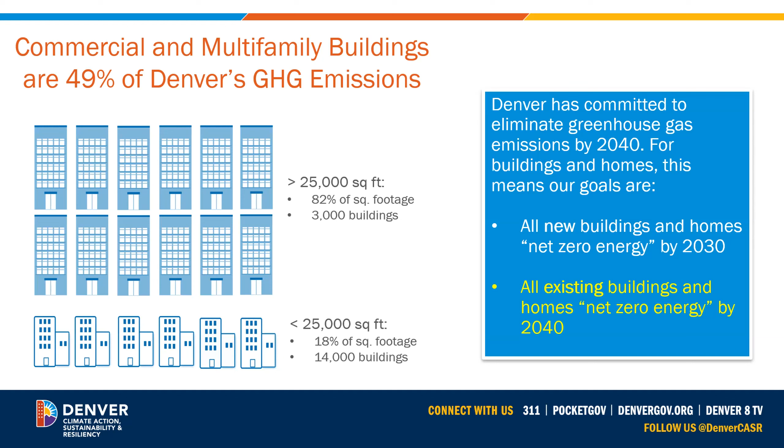As was stated earlier, we're committed to eliminating greenhouse gases by 2040, and we want all new buildings and homes to be net zero energy by 2030. The Energize Denver program has some lofty goals to hit by 2030 that we'll go over in just a second. Also, if you have any questions, please put them in the chat, or if I'm going too fast, tell me to slow down, or if you'd like to stop and revisit a slide, just tell me to go back.

The Energize Denver ordinance covers 3 sections. First is electrification, and that department is helping move the city away from natural gas, with large portions offering education and building incentives and updating building codes. Right now, we're trying to run some pilot programs, and I'll share some links later for multifamily properties or offices in the city looking to potentially electrify before the program really hits the ground running. We also have a benchmarking portion that I hope most people are familiar with.

We're looking at Portfolio Manager, specifically for buildings 25,000 square feet and above, looking at annual energy use and benchmarking. Then the last portion we have is our performance section, for both buildings 25,000 square feet and above, as well as a smaller buildings program that's prescriptive for lighting and solar, covering 5,000 to just under 25,000 square feet.

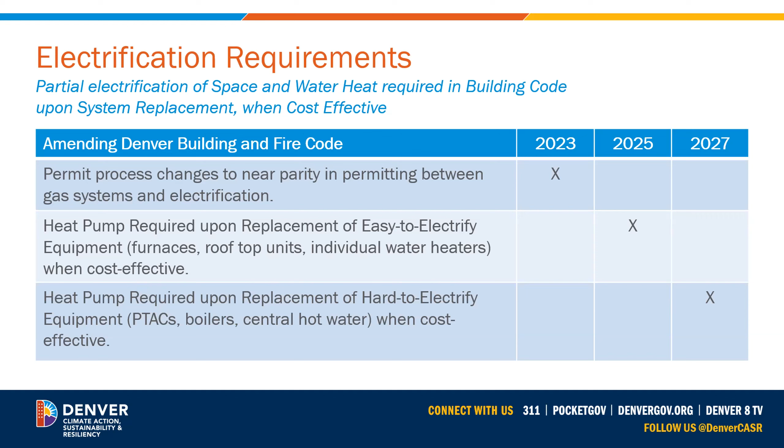The 2022 building energy code - these are for new builds. This one is actually not my specific department, so I don't have as much knowledge on that. But the new building code is trying to go to net zero by 2030 for any new buildings.

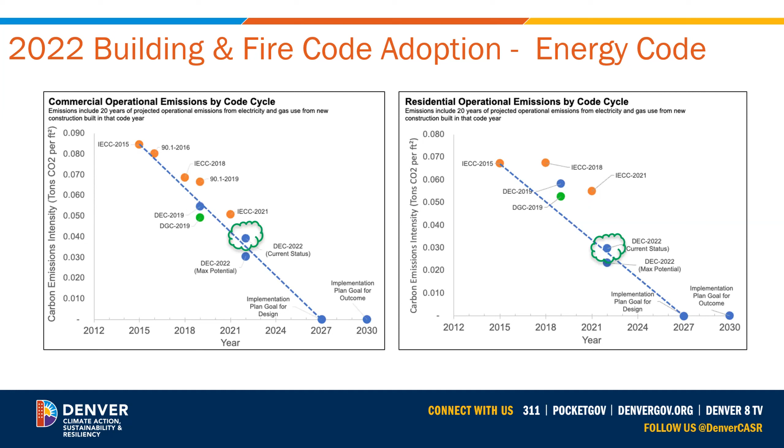We are currently in the process of designing the code, and we should, over the next couple months, have some legislation available.

The code adoption process - the start is where we are right now. So this summer, or last summer, or last 2 years actually, we've taken it from developing the city proposal amendments to now we are currently at city council where there will be a vote, and if approved, over the next couple months we'll have an updated building and fire code, hopefully around 2023, early 2023.

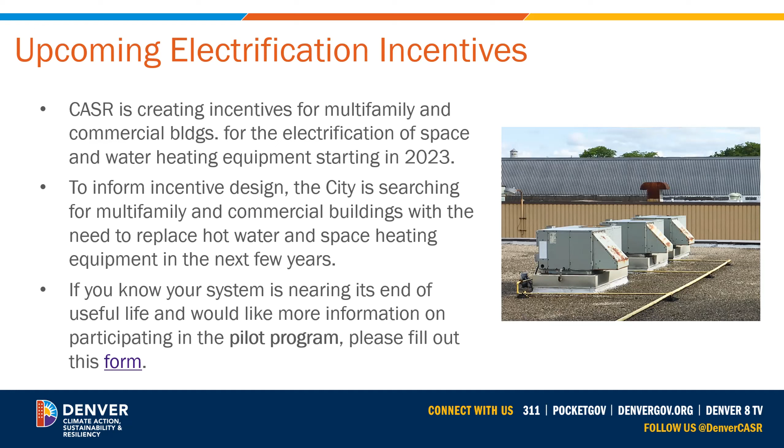Upcoming electrification incentives - we're working on currently creating an incentive program for multifamily and commercial buildings. Right now we have a large focus looking at under-resourced buildings, and we're doing a pilot program that's trying to prioritize that first. So if anybody has any under-resourced buildings that they think might be a good candidate, where they have systems nearing the end of useful life, we're running pilot programs and would love to explore potential electrification upgrades with you. I'll share those links at the end of my presentation.

Benchmarking - as of 2016, we started a requirement to make all buildings over 25,000 square feet benchmark in the city. We actually have an online resource where you can look at those buildings that have been benchmarking and look at their Energy Star scores. Every year, by June 1st, you're supposed to be submitting the benchmarking from the prior year. So for 2024, we are going to require that info to be submitted by June 1st of 2025.

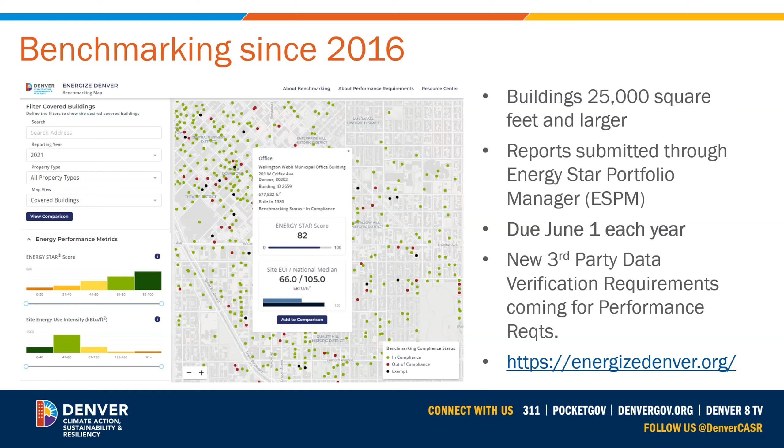One of the new things we're going to do for our target years is have a third-party data verification requirement to ensure that everything being submitted is as accurate as possible. So upcoming requirements, as I touched on, the interim years of 2024, 2027, and the final year of 2030, we're going to have third-party data verification for the benchmarking that's being submitted. We'll have more information on that with our technical guidance being released on November 17th.

And I do see something in the chat. Okay.

And my screen froze. There we go.

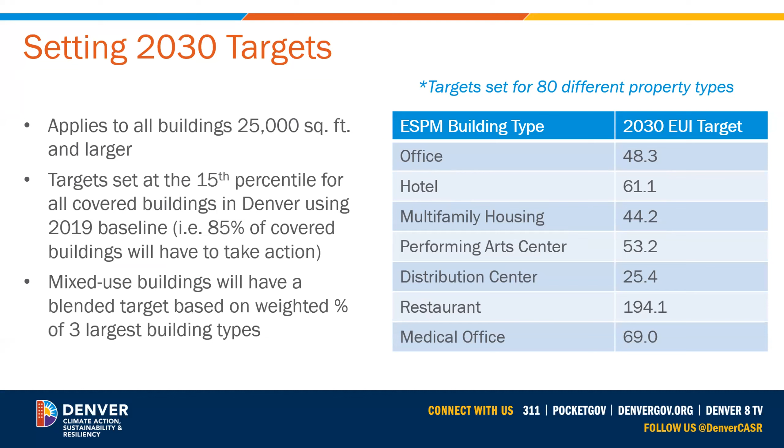Performance requirements - for all buildings 25,000 square feet and above, we're going to explore setting targets, target adjustments, renewables, electrification, and alternate compliance. Right now we have targets set for 80 different property types. Our targets are set to the 15th percentile for all covered buildings in Denver, so 85% of existing buildings will have to take some form of action to improve their efficiencies. Mixed building usage types will have a weighted blended target based on the 3 largest building types.

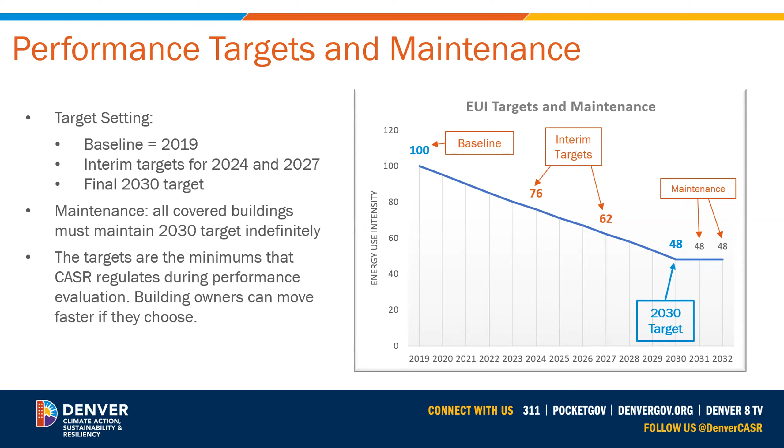As we talked about earlier, we have a progression from your current EUI to your target EUI. So in the interim years of 2024 and 2027, we would want to see some progress towards your final target goal of 2030. These are also minimum requirements - if somebody would like to hit that 2030 target earlier, there's no repercussions for doing that. The sooner you can hit it, the better.

So target adjustments - let's see how I can minimize this thing. One of the things we're looking at, and there will be more information in the technical guidance, is we understand that certain buildings, even though they're the same property type, have certain inherent characteristics that make the building's energy usage tougher to hit the targets that we set.

In that new technical guidance coming out, we're going to have adjustments that look at operating hours for specific building types. We're going to take into consideration indoor and outdoor swimming pools and have adjustments based on that. We'll also look at parking structures and what type of parking structure that is, as well as data centers.

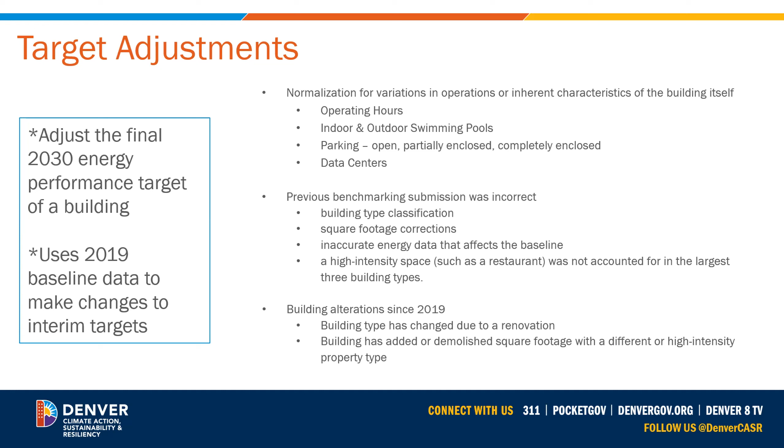We're also going to want to make sure that anything submitted in the past is submitted properly, so we're going to re-examine building classifications and make sure square footage is correct. And if there's any building alterations since 2019, our baseline submission year, or any major renovations, we'll re-explore to make sure it's properly submitted under the right property type. Obviously, if your building is getting demolished, we're going to need proper paperwork to show that the building is planning on being demolished, and we can get you exempt from the program.

Electrification credit. This is going along a potential target adjustment. When you submit your information, we're going to look at the amount of electric usage on the building. And if a building's usage is 80% electric, we're going to offer a 10% increase in your 2030 EUI target.

This is a retroactive target adjustment that we're offering. Part of the city's goal is for the city to electrify as much as possible and reduce the usage of natural gas. So if your existing property is 80% electrified, we retroactively give a 10% EUI credit.

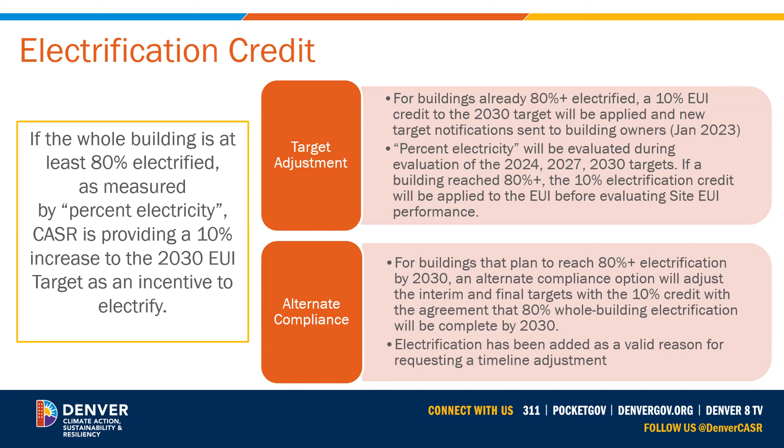That will go to your 2030 target and also affect your interim targets, increasing them as well. If your building isn't currently 80% electrified, but you're planning on hitting 80% electrification by 2030, we'll have an online application where, if that's your goal, we will allow that 10% credit for your interim targets as well as the 2030 target. But we'll have a higher fine structure if you do not hit the 80% you're hoping to hit by 2030.

Renewable credits. We are taking into consideration solar or wind, both on-site and off-site. It will be credited to the building's total energy use before performance targets are evaluated, regardless of your REC retainage. The way this is going to work is we'll look at your 12 months of renewables and subtract your renewable usage from your total annual usage to give you an EUI adjustment.

Ideally, we're trying to incentivize people to do long-term contracts, 5 years plus, for any type of contract. If you're doing a short-term subscription, month to month, that subscription will only be applicable to a certain percentage of usage for your interim targets of 2024 and 2027. They won't be able to be applied to your 2030 targets.

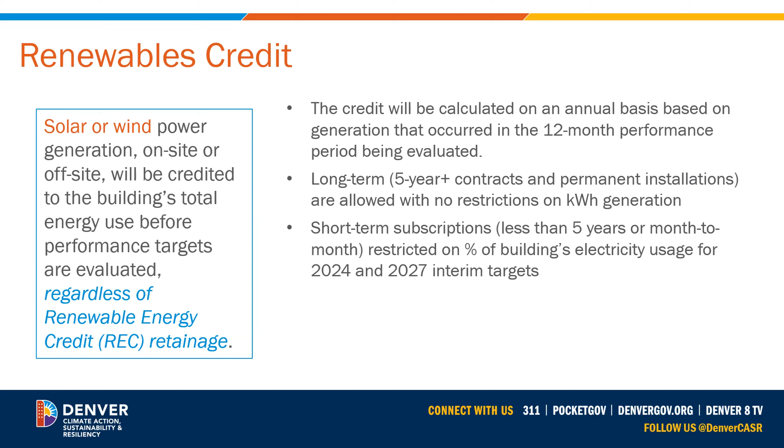There's a quick table of samples of renewable usage. On-site solar and wind, we consider that a long-term contract. For documentation, we're going to look at the total kWh generation and proof of ownership. For any type of renewable contract you have, we'll want proof of subscription or proof of ownership, as well as your total kWh generation.

I can come back to this slide if people want to look it over a little bit more, but I don't know if we have to read through every different subscription option. This will also be released in November when the full guidance is out.

Question: if you do have questions, I want to make sure I get to them. Do offsite renewables need to be on the same grid as the building in question? No, they do not. As long as we can associate them with the property of the building owner, you should be able to attribute it to the property.

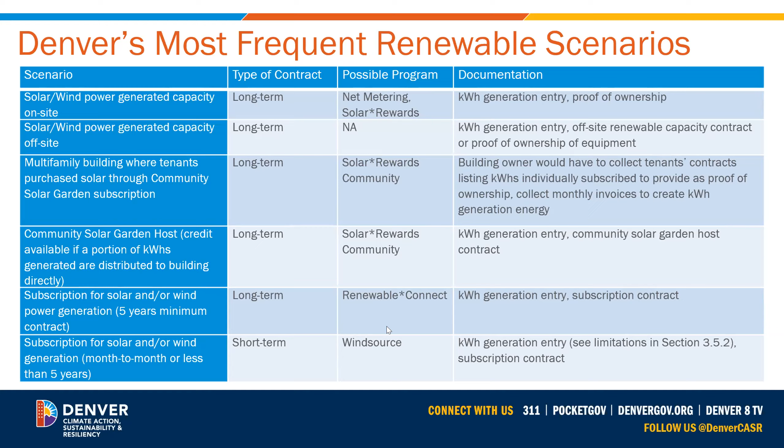Alternate compliance: timeline adjustments. We are offering timeline adjustments so you can extend past the 2030 target under certain situations, such as end of system life, major renovations, historical landmark status, financial distress, or if you're looking to electrify.

Steam loop is also a big one. We understand it's very hard to get off the steam loop, so we're starting to build a focus group specifically for steam loop. If anyone has properties they know are within that, we'd love to help get them included in this group so we can talk in more depth and help adjust targets if necessary to ensure they get into compliance.

Do I know if Renewable Connect will have more space in the future? Xcel is working on a program right now where they're trying to extend and open up more opportunities. I can send a link after this if you're interested. I don't know the full extent of what Xcel is working on, but they've told us they're trying to grow and expand it in order to hit the capacity they need.

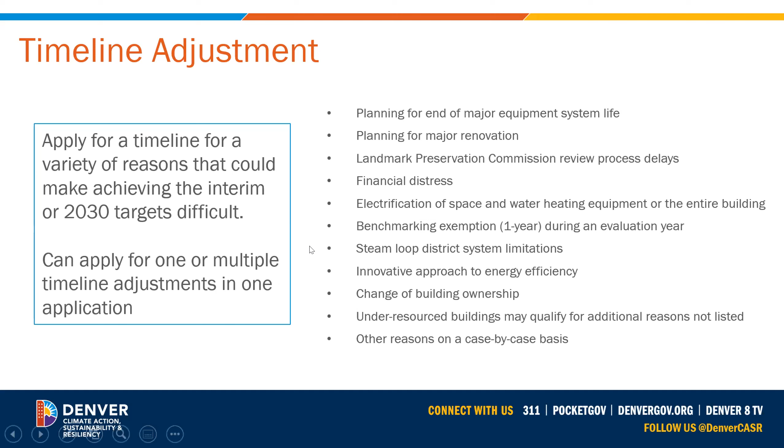Timeline adjustment application. In order to receive a timeline adjustment, we're going to require submission of a couple items. The goal of this is to build a plan to show that there's a plan built out for specific upgrades in order to get the building into compliance.

What we're going to require is an ASHRAE level 2 energy audit, as well as a retrofit plan, electrification feasibility report, operations and maintenance program documentation, and any supporting documentation that will tell the story of what needs to get done in order for the building to reach compliance.

One of the things we'll be considering with certain equipment is the useful life of each piece of equipment. Ideally, people are planning for when a piece of equipment is getting towards the end of its useful life, what they're going to upgrade it with, and understand the efficiencies that will come with that.

Once they submit that plan, we'll review it with the building owner, and we'll come to an agreed upon timeline, and penalties will be assessed if the plan is not completed as agreed upon.

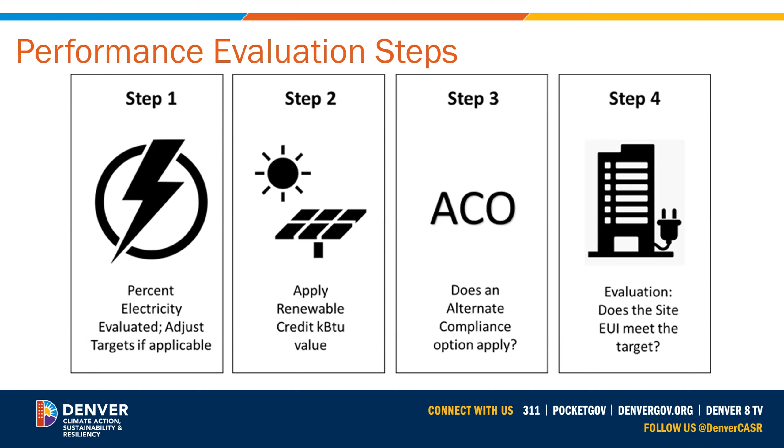Penalties: our goal as CASR is for everybody to reach their targets by 2030. We're committed to do everything we can between alternate compliance options and flexibility for all these buildings to get into compliance. But penalties will be assessed by examining a 12-month performance period for the target year after benchmarking is received.

That's by June 1st of the following year. The way the penalties will work is it's actual KBTU used versus target KBTU, which is the equivalent of KBTU not achieved. We multiply that by our penalty cost to get the final penalty amount.

Is there a bond or other stake dangling over projects prior to a non-compliance penalty? When there's an agreed upon timeline...

When you say bond, can you elaborate a little bit more on that, Andy? Yeah, I was specifically asking because Seattle has something kind of similar, where if they're doing a development incentive where a project has an agreed upon EUI target with a 12-month post-occupancy period, they require the building owner to sign essentially a statement of financial responsibility, or have some other kind of paperwork in place so that it's not just issuing a penalty without any recourse. And it's caused some challenges, obviously, that's a bit of a challenge for a lot of owners and they don't like it.

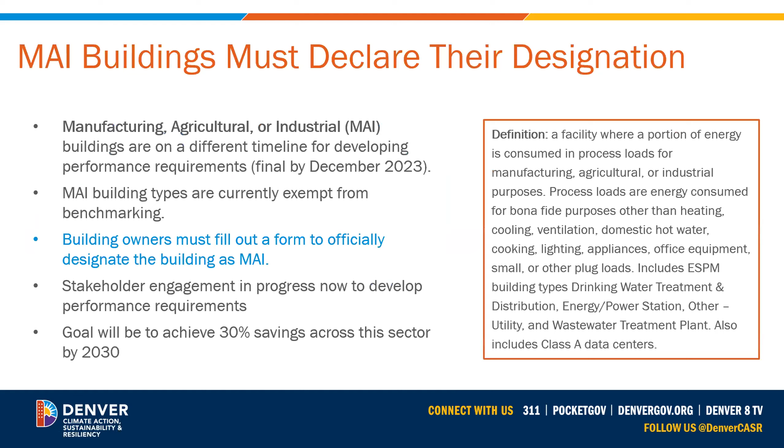Last, and then I'll go back to the chat and answer any questions. A little timeline for us.

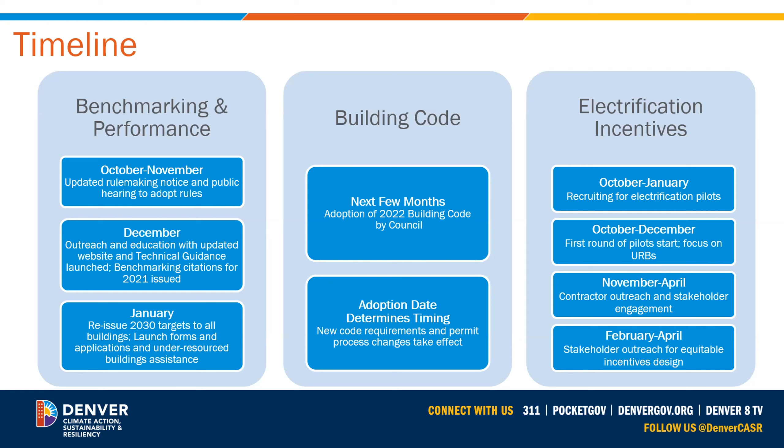So the big thing right now is we're trying to recruit some electrification pilots again. So if you're interested and you think you have a good property that might qualify for the program, I will add the pilot submission form into the chat after the meeting.

Questions? I think I have one more question in the chat. What would determine if the penalty is at the maximum or minimum level?

So the maximum level is if a building's not benchmarking and they more or less are lying, or we catch them making up information about their building, that's when we would have the highest penalty level. Other than that, we're going to be looking at 30 cents per kBTU out of compliance for virtually everything besides that situation. There is a 50 cents, and I'll go back to that.

So we do have a 50 cents per kBTU penalty for being out of compliance with the timeline adjustment. That means if you don't hit the targets agreed upon with us, then the penalty structure will be higher than the original just being out of compliance.

Why is parking included in the drafts issued in August and September? What is the intent there and how does that work with Energy Star Portfolio Manager definitions? So I don't know if this is going to exactly answer your question, but the purpose of including parking is we're going to give a target adjustment that looks at square footage and the Energy Star EPA guidelines on additional usage per square foot of specific parking types. We're going to offer a target adjustment based on the size and type of parking garage that exists. Hope that answers that question.

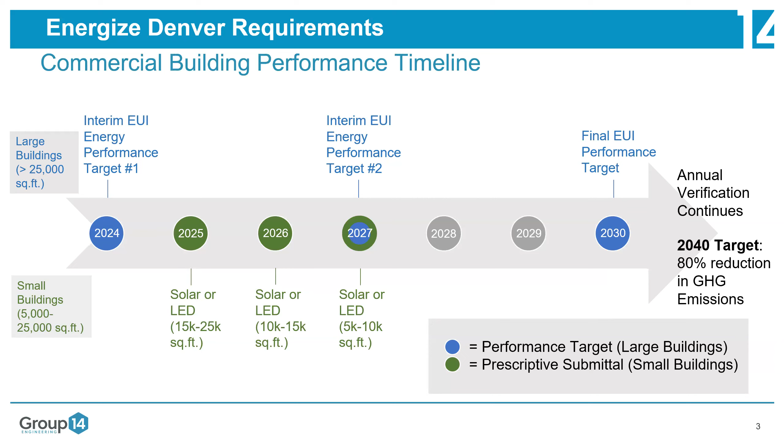All right, so we'll get rolling here with some additional details. I'm going to try not to repeat too much information, but I am going to add a little bit more context I think will be relevant to some of the energy providers and energy modelers on the call today. So we've already heard the overall timeline and the various elements, the interim targets in 2024, 2027, and 2030. I wanted to hone in a little bit on some of the rules and regulations details and changes that have occurred in the most recent rounds.

The last of which, Denver indicated that they did not receive as many comments, so it was pretty close to final in the last version that they submitted. So a couple of these were mentioned, but I wanted to give a little bit more information on the data verification. This is now going to be required for each period, so 2024, 27, and 30. I put on here the credentials that the rules and regulations allow for people to perform this assessment or verification, and what the requirement is to complete the Energy Star data verification checklist. The main things that we're checking are the factors that go into EUI.

So the main being the area, and then the other being the energy use. I know we've been starting to check this for a lot of buildings, and a pretty high number of them have something wrong with either of those two numbers. Either it was an area that was maybe taken off of a lease agreement that is not the actual gross area of the building, or a tenant meter that was missed and just wasn't included in Energy Star.

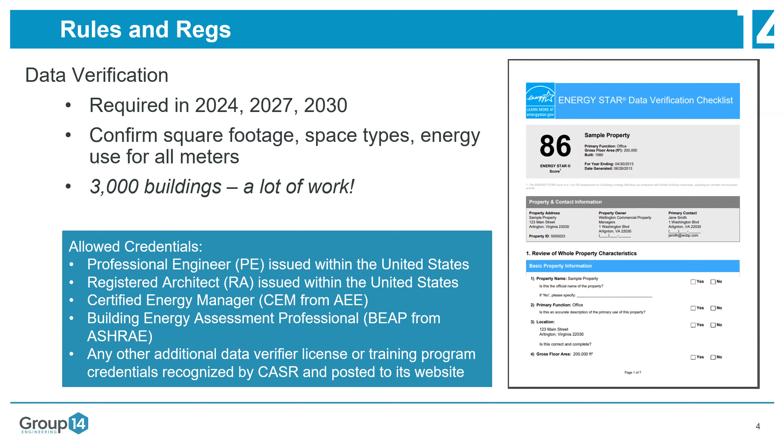So it will be important. I don't think it'll go straight to the maximum fine if you accidentally have wrong data, but it will need that verification at that time. And it's a lot of buildings, so it's maybe not the most fun work, but a lot of people are going to be needed to do these verifications.

I just wanted to clarify on the target adjustments. I know there was a lot of questions and discussions about this early on. The target adjustments used to be an alternate compliance pathway, and there was talk of potentially doing energy models or energy audits to say what a building could do. At this time, Denver has decided not to go down that route of submitting what the building's maximum savings potential is. It's too difficult to be consistent, unless the city's doing the analysis themselves, expecting every energy consultant to do the same energy audit or the same energy modeling to say what is really possible was just determined not to be feasible or fair.

So really, it's just sticking to the adjustments that are noted by Energy Star that have very clear impacts to EUI. So if you have a swimming pool, Energy Star says how much extra energy that would use. So these adjustments would be kind of tacked on to your target to allow this additional amount of energy.

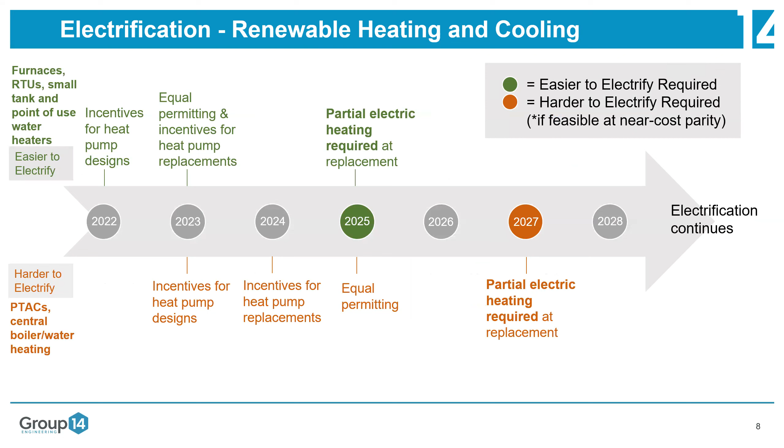These are the two buckets of incentives right now. One is the steam to electric conversion program—any building on the steam system can apply if they want to switch to electric systems. There's also the pilot application, which Derek mentioned, for incentives to switch to electric. Right now this program only focuses on the first round, which is our easier to electrify equipment. So if you have a boiler that's natural gas, not steam, and not part of this first round, it would not be eligible for incentives in this electrification pilot at this time.

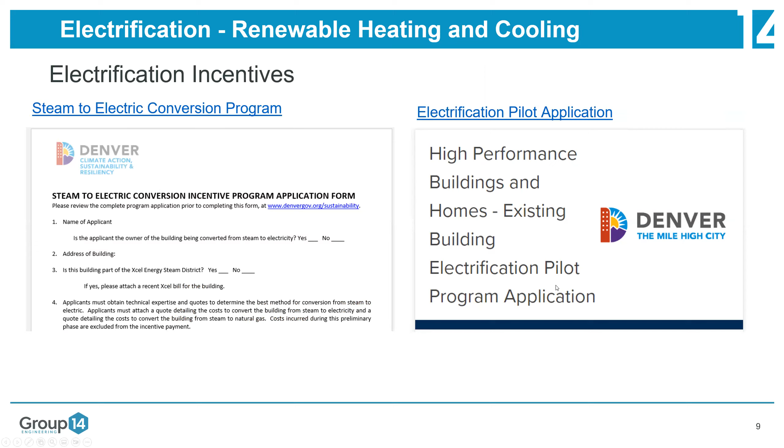Wanted to pull this together with the Colorado performance timeline. We're working with the state on some analysis for that task force, which is coming up with recommendations. Right now it looks like it will be a similar program with EUI targets, and with their carbon reduction goals, the percentage reduction is similar, so the 2030 targets will likely be similar. It will be a little tricky because they have a different interim for whatever reason.

It got put into the Colorado state bill: 2026 as a 7% reduction, then 2030 as 20%. So it's not a straight line from now to 2030, whereas Denver is a straight line—you just pick the interims along your line. This one has a different reduction needed to hit that emissions path. We're not sure yet whether they'll actually keep that non-straight line or adjust it, but that's a difference there.

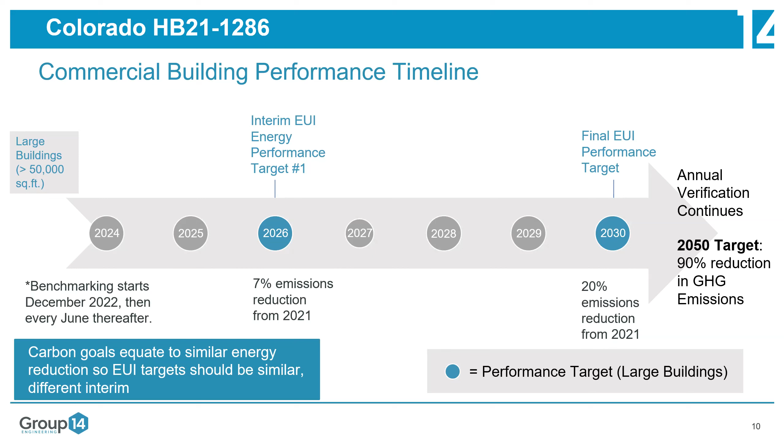They also have a difference on the renewable energy side, which I'll mention a bit. I wanted to give an example—we're starting to do these studies for building owners and portfolios of buildings. Some just have the goal to decarbonize, and some are just trying to meet the program. Both have the same kind of end goal, but might have different objectives from what the owner is trying to achieve. I wanted to give an example of how we're looking at these projects.

First, doing that inventory, looking at where the building's at, and a big part of that is verifying their data—is the baseline really the baseline? Do they have the right areas in the system? What is their actual energy use? Then setting the goals for that reduction. For some building owners, it's just meeting what the city requires. Others have more aggressive goals, like wanting to meet net zero or zero carbon by a certain date.

From there we're really looking at three different prongs to the study: energy efficiency, electrification, and renewables. Energy efficiency—trying to reduce as much as we can to start. Electrification—having a plan for replacement. And then renewables, which I have shown at the end, but adding renewables can happen anywhere throughout the process, especially if you're going to have a hard time meeting your interims. You might have to stack on renewables, on-site or off-site, to hit your goal or EUI target and avoid penalties.

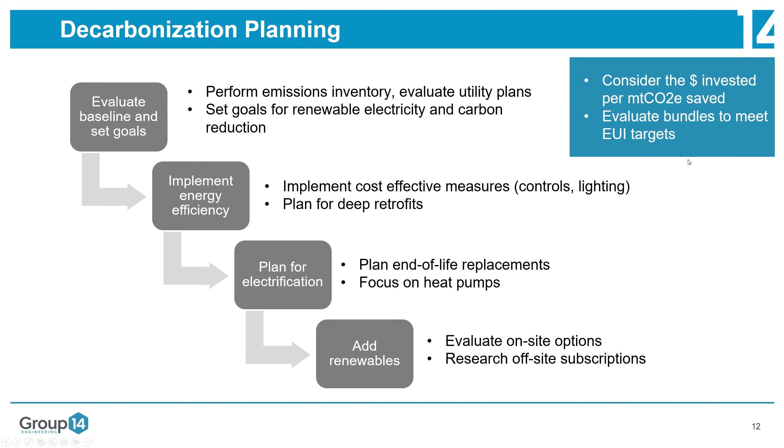And this is just an example of how these things don't always align. This is a study that we did for Denver Public Schools.

If you look at energy use intensity, natural gas, this is across their entire portfolio, so over 170 buildings. Natural gas is by far the biggest culprit in their energy use per square foot, their EUI. So if you want to reduce EUI, you focus on natural gas, but the energy costs, electricity is the biggest culprit. Natural gas is still very cheap. So it kind of flips the picture there. If you want to save costs, you're looking at electricity.

And on the emission side, the emissions look closer to the cost right now than they do the EUI, but as we go over time and the grid cleans, it really becomes a much smaller piece of the pie. So looking at electrification from the emission standpoint, kind of setting those goals of where are you at now, what are your objectives, and what is the best package to get there.

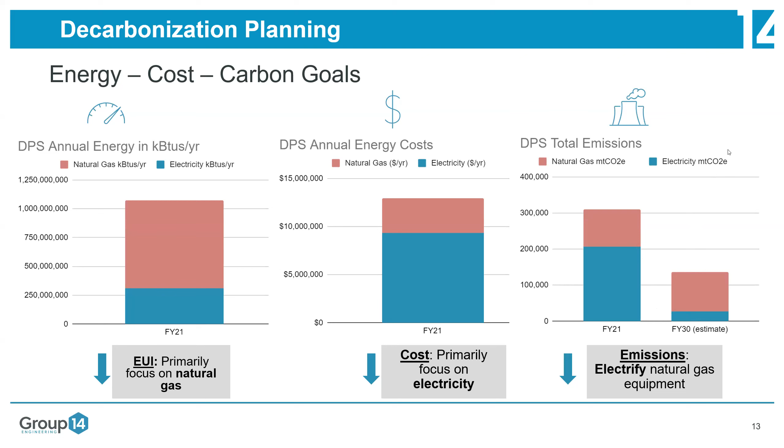This is also from that same study where we mapped all of the EUIs of the schools, looked at CBECS, so the Commercial Building Energy Consumption Survey, sort of this national average number which is more like 70, and also the EUI for the city of Denver for schools, which is 48. Denver Public Schools does not have to actually meet the 48 for the city, since they're not bound by the city rules, but still wanted to evaluate following those recommendations.

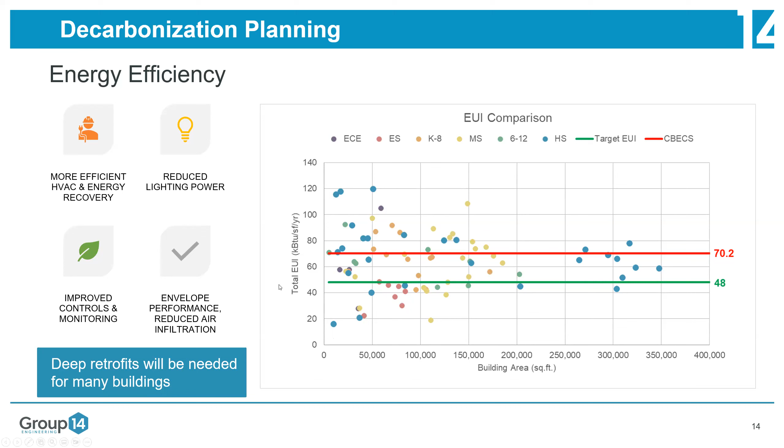And as you can see, for this group of buildings, it's kind of all over the board. A very few number are under 48. It was a very similar spread to what the entire city looked like, so less than 20% have already met the goal. Point being, there are a lot of buildings that are going to need deep retrofits if you're really just going to try to meet the EUI with improvements. You can always add on solar, or offsite solar, but just getting the EUI down alone is a pretty big undertaking. Some of these have 50, 60% reductions, which is a pretty challenging modification.

Electrification, just wanted to note here that Denver kind of has it as like easy and then everything else, or they specifically reference boilers and PTACs. There is a lot of other equipment that does have viable heat pump technology today. So as we do these studies, we're looking at where we can incorporate that. Specifically for Denver Public Schools, there are unit ventilators that can be electrified now, used in a heat pump technology. So there are heat pumps now that can be in this distributed configuration. You still have to keep your boiler for backup. So there are different nuances there, but there is kind of technology today.

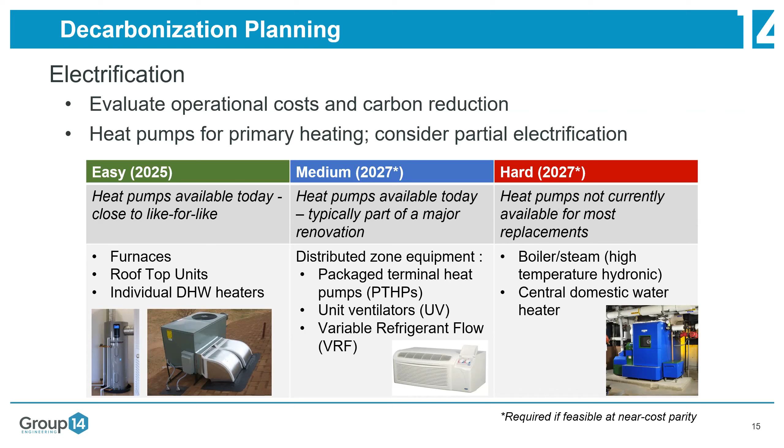When we get into the boilers, that is still hard to electrify, mainly because there is not heat pump technology available for that high temperature heat. In a lot of these, we are recommending partial electrification, where you keep your natural gas for backup. It could be a natural gas boiler, it could be a natural gas section in your rooftop unit, and that really helps reduce the electrical first cost and operating cost.

And then renewable energy, kind of that third prong to this, is determining goals in future electricity use. This one gets pretty tricky in the terminology around renewable energy credits. Right now, Denver is saying that it doesn't matter if you sell the RECs or not, you can count any solar that you're subscribing to or is on your buildings. The Colorado program is not allowing new RECs. They said they would grandfather in existing solar, but once it's passed, you can't add new solar and sell your RECs and count it toward your EUI commitment.

So this could, in the rules and regs language for Denver, it says that any RECs or any version of RECs are allowed, but this could change and may align with the state. But if it does change, they will continue to grandfather in the solar that did have RECs. So you just have to keep an eye on if they do change that language and consider whether or not you're trying to meet both programs.

There's also some nuances in what you can say. If you've sold the RECs, Xcel Energy has a whole thing on their site about what you can and cannot say, and you're really not supposed to say that it's your renewable energy anymore. So if you want to say we're 100% renewable energy, if you've sold those RECs, technically that's not true. So there's that, it really needs to keep the RECs.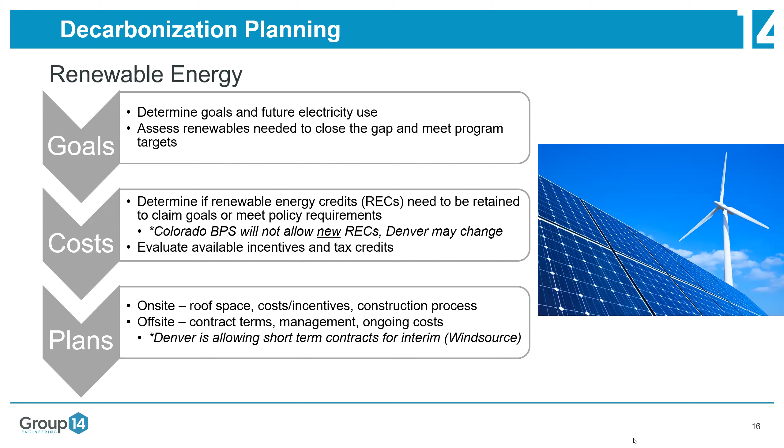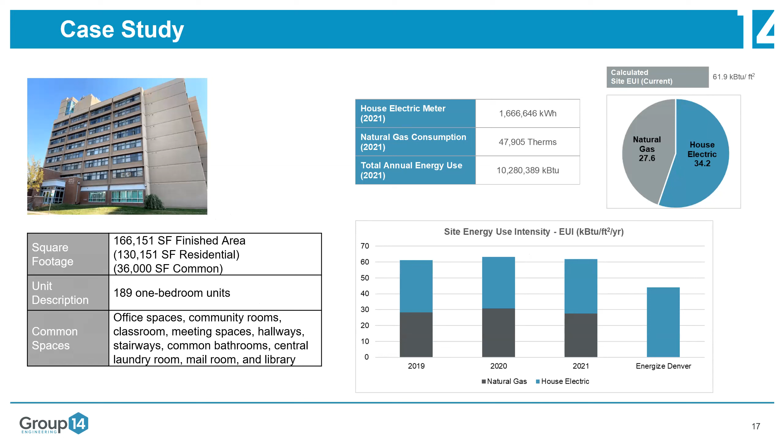Just a last wrap up here, an example of one of these projects where we looked at a multifamily housing building with a pretty normal split, 50-50 on electricity and gas. Looking at these levels as we go through, you might need to do energy efficiency for your first interim, might need bigger improvements such as heat pumps to get to your next level. This particular study, they wanted to know what it would take to get to 100% carbon reduction, zero carbon for the big building, which would mean full electrification, replacing the boiler, and a large amount of solar that will not all fit on site. So it would have to be a combination of offsite and on-site. This is just an example of doing these studies, looking at bundles for the interims and what it would achieve overall.

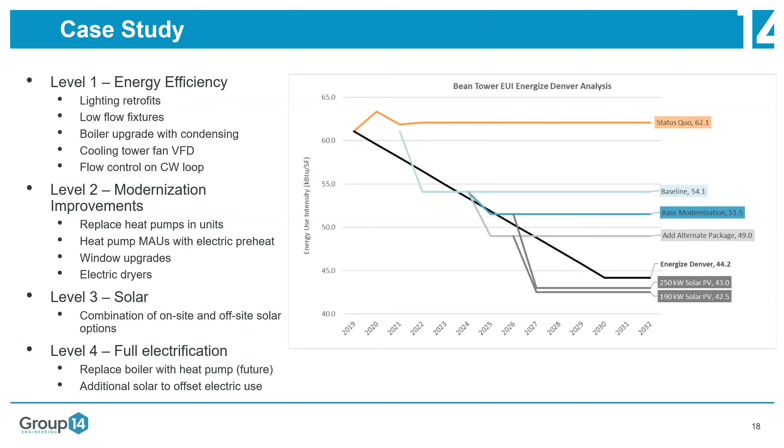And I think that's my last slide. So I think that's probably good for the comments, and I'll turn it over to Taylor.

Thanks, Celeste. All right. I don't see the comments now either, so let me know when you get a comment. Sorry, it disappears. Anyways, so you made it to the last speaker. Congratulations. I hope we didn't... Some people are still on here.

I'm going to talk just about new code, right? So that was all Energize Denver, existing buildings. This is the energy code for new construction, major renovation in Denver, and what's going on.

So let me go to the timeline here. A few key things, right? This is really from the perspective of a practitioner that's following all this. I've been involved in some of the committee hearings, but I am not on the committee. So, Jamie on the call is on the committee, there's some people that are voting members. So this is really just from someone that's really interested, that's following it, that practices and works on a lot of buildings in Denver.

So Denver's been... the 2018 IECC, when they adopted that, they had their 2019 amendments. That was the first real aggressive amendments that Denver added to the energy code. And now this is phase 2, you could say, or the second time Denver's doing this with the 2021 code. It's been happening for a long time, over the past year and a half at least. Really it ramped up, the city requested amendment proposals, they got all the proposals, and then they had their committee review proposals and vote on them. So that's all happened. And now the city is combining all those proposals into their amendments in a way that makes them not compete with each other and make sense, right? So that's what's going on now.

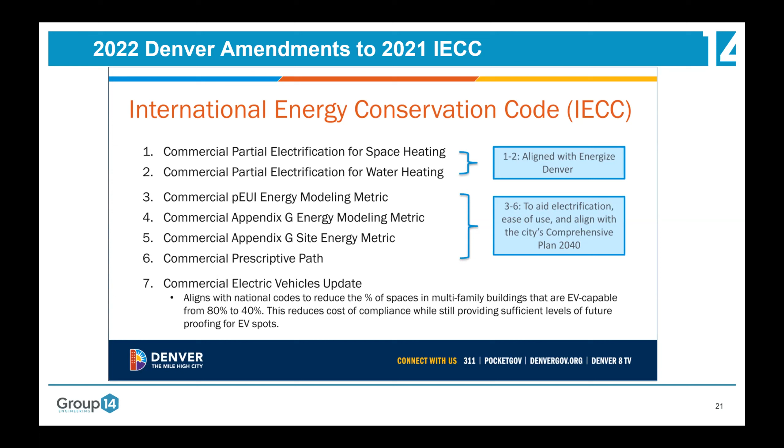So kind of the outline, and then I'll go through, again, I have a bunch of code snippets. They're all in red because this is not final, so don't hold me to anything, but just to try to give everyone a good idea.

So space heating electrification, this is mandatory, both the electrification requirements are in mandatory sections of the code, but then they have all these exceptions. So space heating equipment, fossil fuel warm air furnaces, electric resistance space heating equipment shall not be permitted for space heating. So Denver really wants heat pumps.

But this is an interim goal, so there's a couple things in here. Really I think the intent of this is trying to get rid of bad electric resistance that's really inefficient, and like individual, more residential style gas equipment. So you can still do larger boilers, this does not exclude a gas boiler.

I think something that got confusing, and we'll see how the final language comes out, again this is a draft, not final, but it's like, are RTUs with gas exempt? Is there a certain size? Is there a certain type?

There's some exemptions down here for makeup air units and unit air, things serving kitchens. So things like that, there's some exemptions in here, you can read through all of them.

The other important thing is that you can do electric resistance if you comply with the energy modeling pathway. That got on there, and some of this electric resistance for reheat got in here, but really a lot of this is for just keeping flexibility.

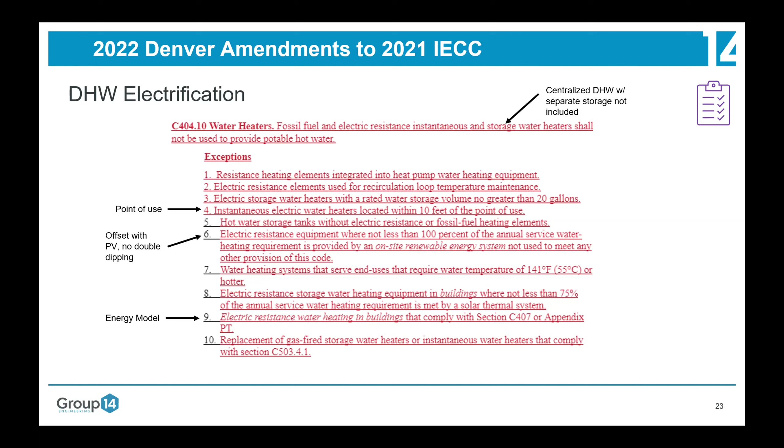They also added some demand response stuff. I'm going to fly through these since we've been talking for a long time. EV charging I already talked about, but essentially for residential multifamily it changed from 80% had to be ready to now 40%, so they reduced that burden. Everything else remained the same.

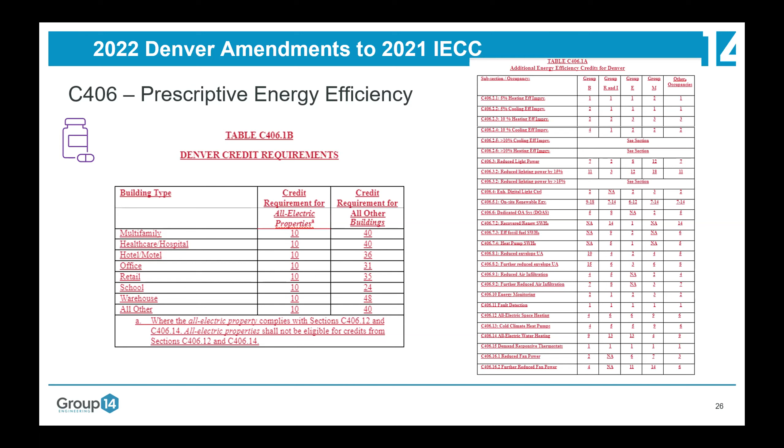This is what I was talking about with C406. It gets crazy, a huge list, a bunch of point options. Denver messed with all of this to align it. The biggest takeaway, though, is this credit for all-electric buildings versus all other buildings. If you're going prescriptive and all electric, it's not a huge deal. If you're not all electric, you've got to get a ton of points, and you'll be looking at this menu trying to figure out everything you can do to get all your points. That's the big takeaway there.

Cool, so let's talk modeling. C407 is still there, but the methodology we all know and hate—or love, depends on who you are—is totally gutted and basically replaced with the PCI methodology. So it's really leaning on ASHRAE. If you're doing any baseline modeling, the intent is that it follows ASHRAE Appendix G methodology for the new code. You've got to follow that.

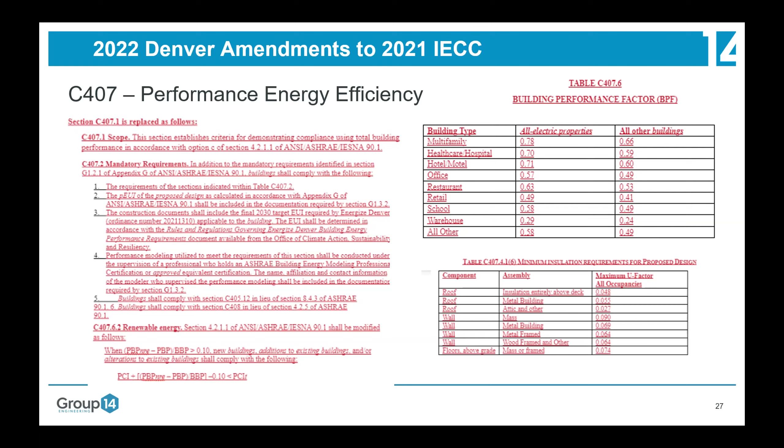So that's C407, PCI. Then there are two appendices. Appendix PT—which I don't remember the acronym for, so this one is the PEUI—similar to Boulder, and this aligns closest to Energize Denver. This is saying no baseline, don't do all that crazy calculation, model your proposed, hit the target, and you're good. So these are the EUI targets.

It's really limited in scope right now. I actually proposed this one to the committee, so I can tell you the intent behind it was to put our foot in the water. Denver wants to get here eventually, but they don't want this to be the only option. So it's limited in scope to try it out under this code cycle and hopefully develop and implement it more in future code cycles. It's very small because there's a whole other document called Denver Modeling Rules and Procedures that you'll be required to follow if you go this pathway, to help inform better models.

So PT is PEUI, SE is site energy. Again, the biggest problem PCI has for a jurisdiction like Denver that's looking to electrify is it has a gas baseline for climate zone 5B. So this appendix tries to deal with that by doing site energy instead of cost—you still have a gas baseline, but you're not doing cost. That aligns better with Energize Denver as well. You still get a break on your building performance factor for all electric, but really if you're mostly electric—anything other than a full gas heating building—this and the PEUI method are going to be used more.